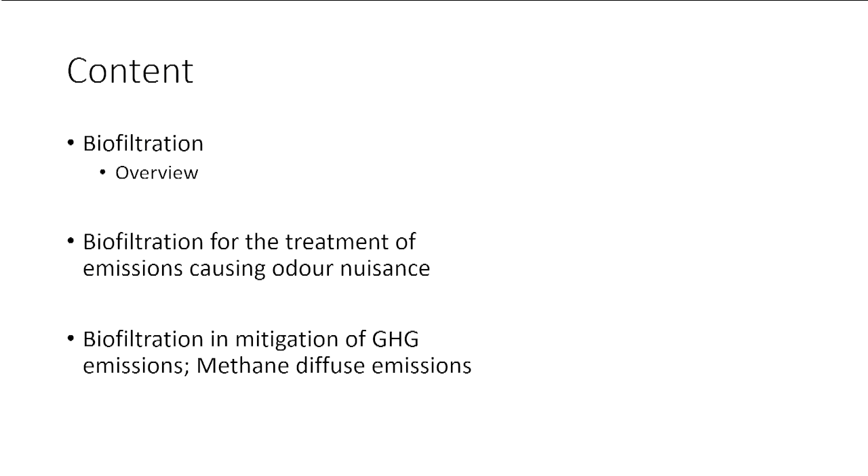In Chile, for example, we have different sectors that have been regulated in terms of the impact of odor. Also, because of the problem of global warming, I think it's very important to look at biofiltration as a tool to decrease emissions, mainly those generated in landfills or wastewater treatment plants, and in different agropecuarian activities that generate methane, but in very low concentration, not valuable enough to get energy from them.

So let's see what a biofilter is. A biofilter is a very simple technology, a very simple equipment in which you pass contaminated air through a filter normally composed of an organic material or a mixture of organic materials, in which microbial communities are established to degrade all the compounds that go into the contaminated air.

Normally, those communities are present in the organic material used for the biofilters, or can be inoculated using aerobic sludge from a wastewater treatment plant, or we can inoculate with pure cultures with specific abilities to degrade the contaminants present in the emission. That is the strategy we are using nowadays in the developments we have participated in at an industrial level.

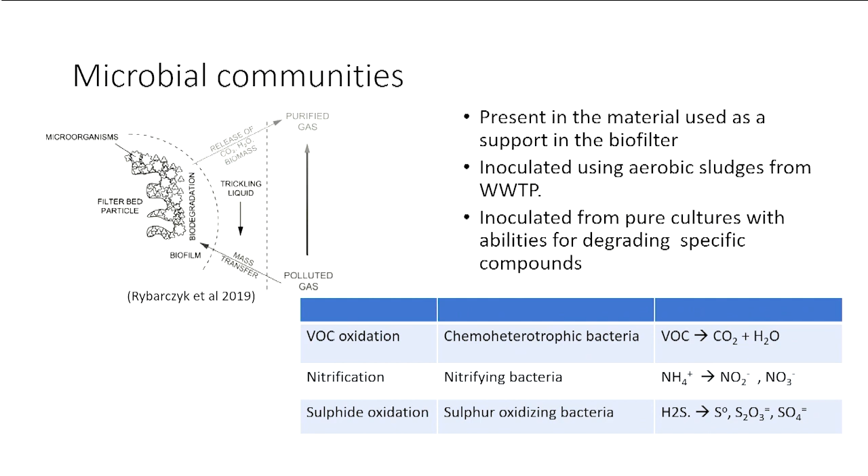These microorganisms form a biofilm over the support, over the substrate that is used as a filter.

I hope it works. Thank you very much. I hope it works here on the red one. Okay, okay.

For this bed, we can use several organic materials: peat, compost, bagasse, wood chips, forest residues, pine bark, soil. It's also possible to use different inorganic materials that give different properties to the support. For example, zeolite, vermiculite, or perlite increase the water retention of the material, so the microbial activity can be maintained. Also, shells are used in order to keep the pH of the system stable.

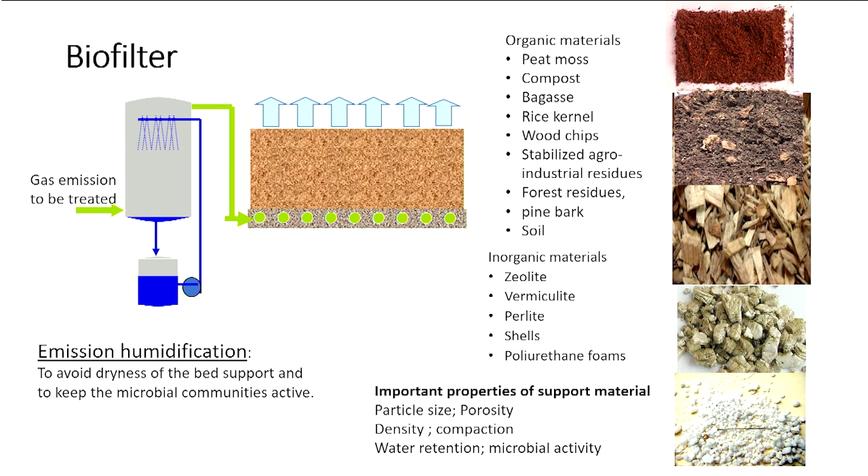This is how a biofilter looks, an open bed, and this is a closed bed. As you can see, this is also affected by atmospheric conditions; in winter or summer there are different conditions in the operation of this equipment. A closed bed avoids those different atmospheric conditions, and in this case, you can have the emission going downwards through the bed.

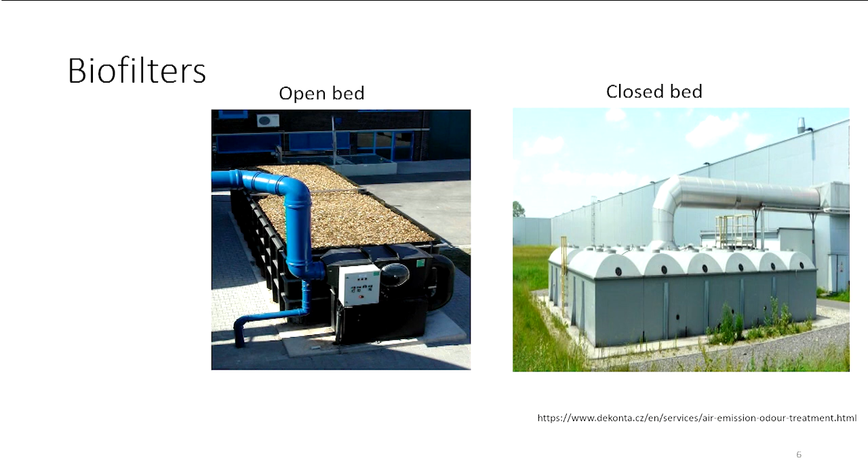The other biofilter is the biotrickling filter. That is a kind of scrubber in which the biofilm is on a support material that is an inorganic material. In this case, there are some solutions circulated through the column to keep the pH and to provide nutrients to the biofilm, keeping it alive and active. This is a more controlled reactor. You can control the pH and the temperature, and it looks like this. These are the different supports that you can use. Usually the same supports used in a chemical scrubber are used in this equipment.

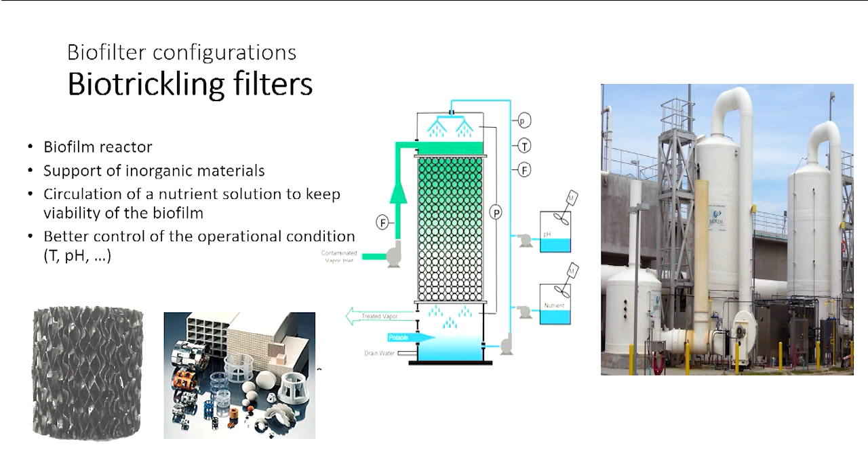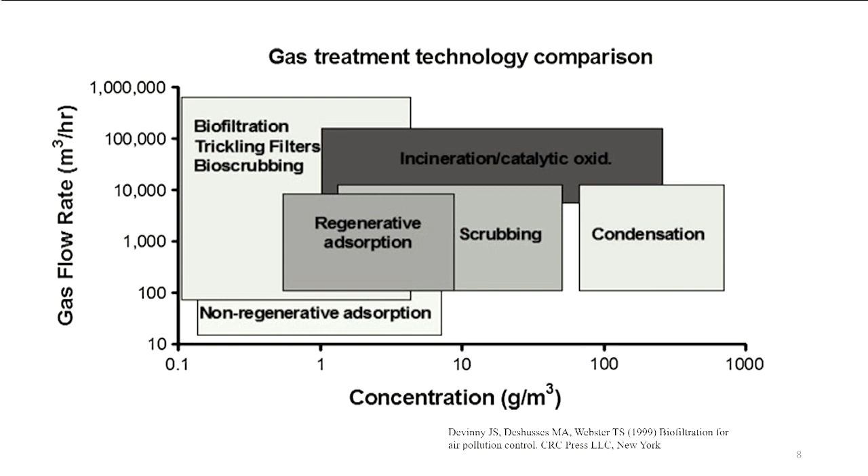This is a figure showing the applications of different gas treatment technologies: condensation, incineration, scrubbing, regenerative adsorption, non-regenerative adsorption. Here we have biofiltration, trickling filters, and bioscrubbing, which are cost effective when we have very low concentration of contaminant and very high gas flow to be treated. This is also where we find problems associated with odors, for example.

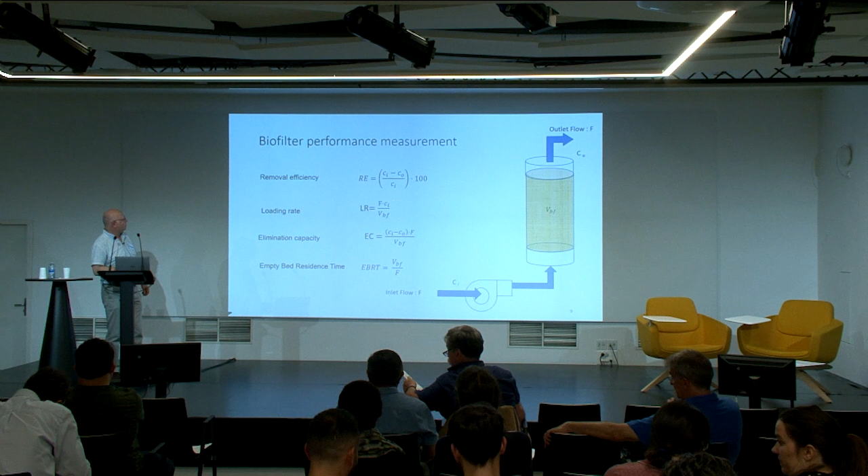In terms of measuring the performance of the equipment, it's possible to calculate the removal efficiency, just the difference between the inlet and the outlet; the loading rate, calculated as the concentration of the contaminant at the inlet multiplied by the flow divided by the volume of the biofilter; the elimination capacity, the difference between the inlet and the outlet multiplied by the flow divided by the volume of the biofilter; and the empty bed residence time, the volume of the bed of the biofilter divided by the flow. These are the main variables we use to know how the equipment is operating.

There are many phenomena that occur inside the biofilter. We have a biofilm, a liquid that usually trickles through the system, the support, and the contaminated air circulating over the system.

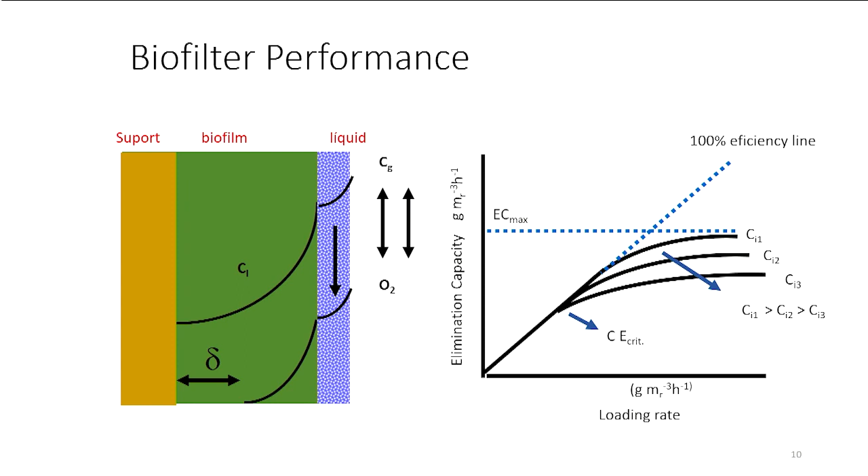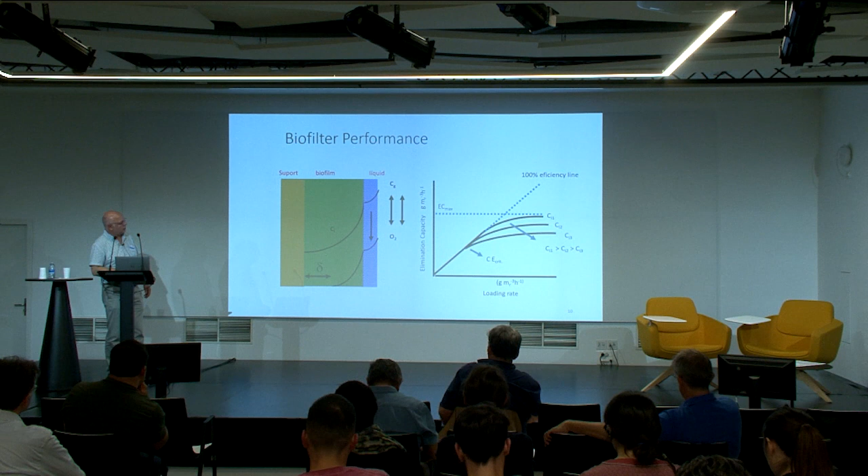This is the typical graph showing loading rate versus elimination capacity. This line corresponds to 100% efficiency. For example, if the loading rate is 1, the elimination capacity is also 1, giving 100% efficiency. But if we increase the loading rate, the curve moves away from the 100% efficiency line, depending on the concentration of the pollutant and also the empty bed residence time used in the reactor.

For example, here we have a biofilter with a biofilm of Thiobacillus thioparus for eliminating hydrogen sulfide, using peat as support. You have the sulfur loading rate and the elimination capacity. Here is the 100% efficiency line, around 30 and 30. With 25 it works better. Here we have 100%, and then the other part of the curve, meaning the system is controlled by the activity of the biofilm, while here we have a problem with mass transfer.

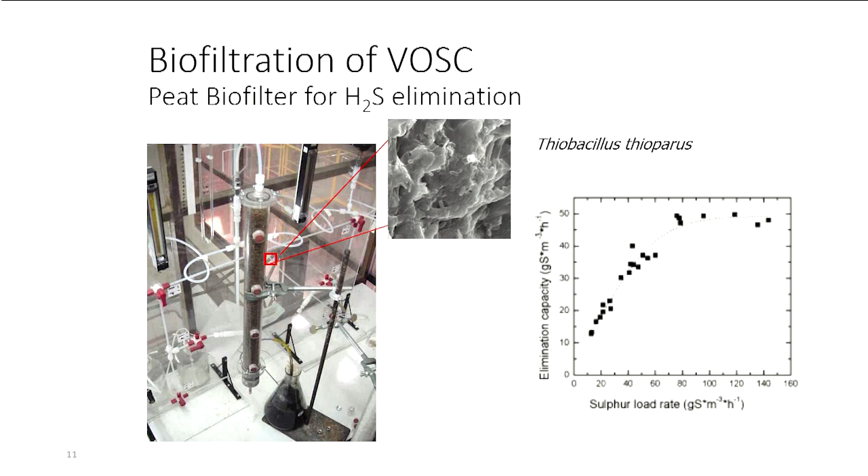This can be seen in these two figures, where by modeling and determining some parameters, we can see that in this part of the graph we have a limitation by diffusion, and here we have a limitation by kinetics.

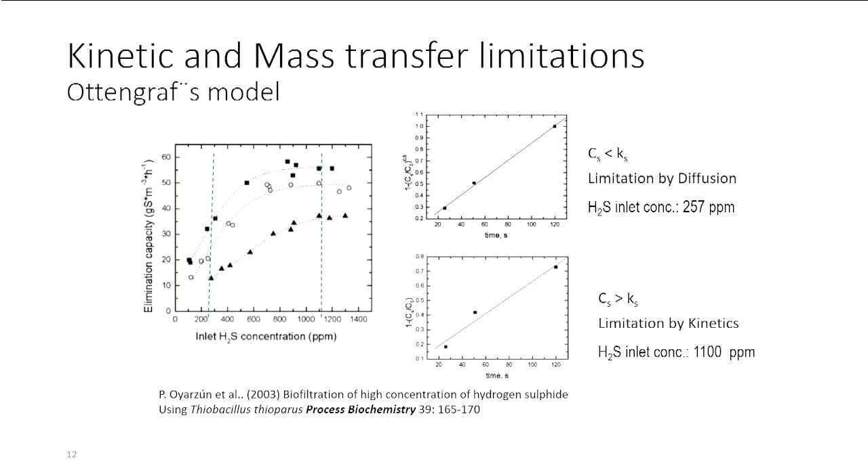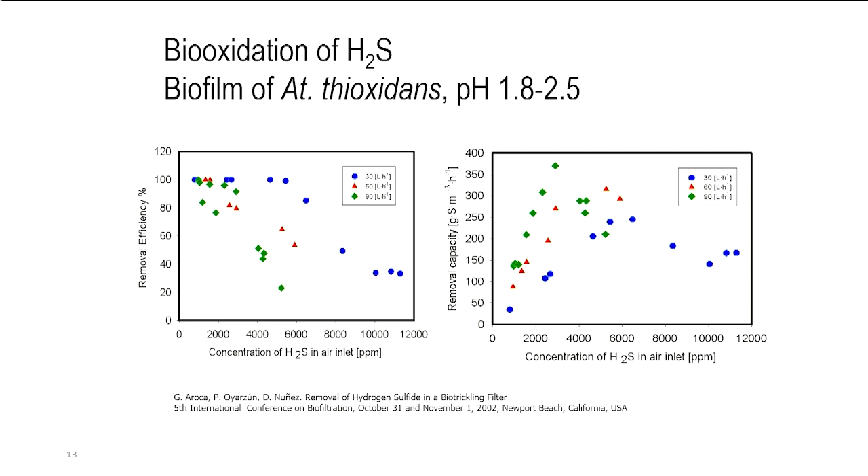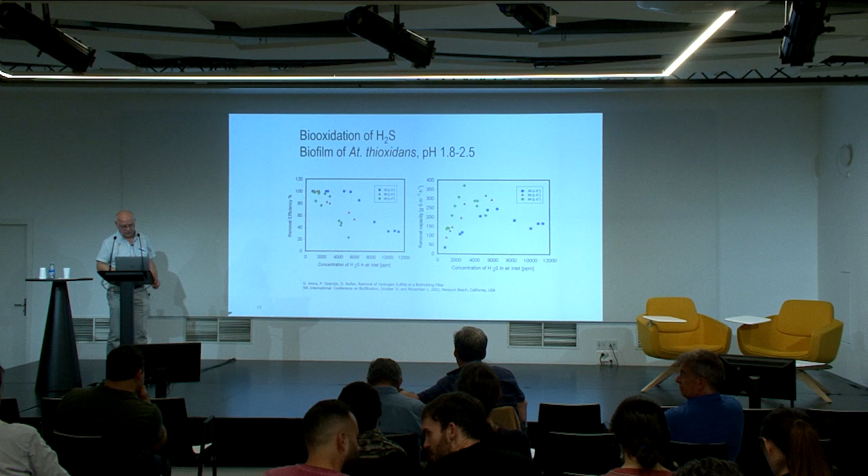In this graph we also see that Acidithiobacillus thioxidans, which has an optimal pH between 1.8 and 2.5, can grow and remove hydrogen sulfide at high concentration at the inlet of the reactor. It supports very high concentrations, here almost 6,000 ppm, which is a lot of hydrogen sulfide in the medium.

For that reason, it is possible, for example, to retrofit some chemical scrubbers to convert them into biotrickling filters. This is a work by David Gabriel and Marc Deshusses in a wastewater treatment plant in California, where they converted a chemical scrubber into a biotrickling filter by inoculating this kind of bacteria.

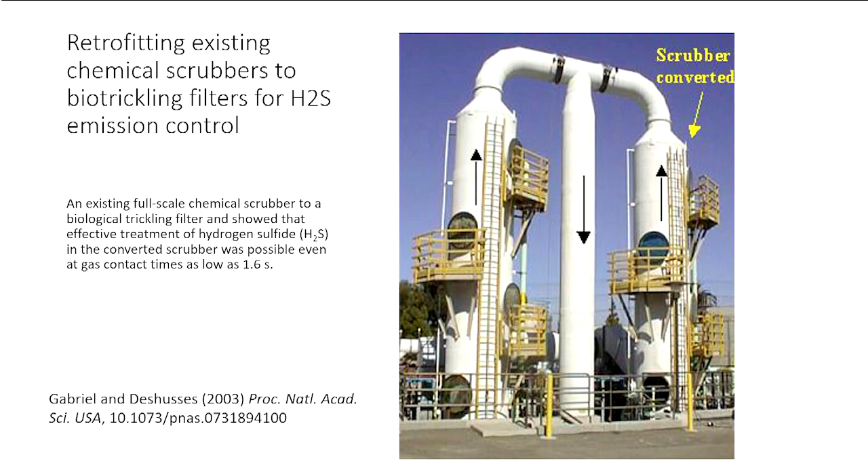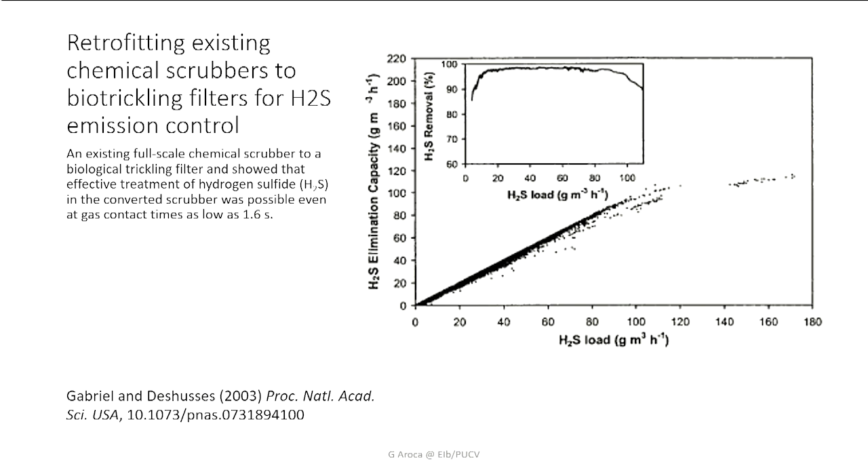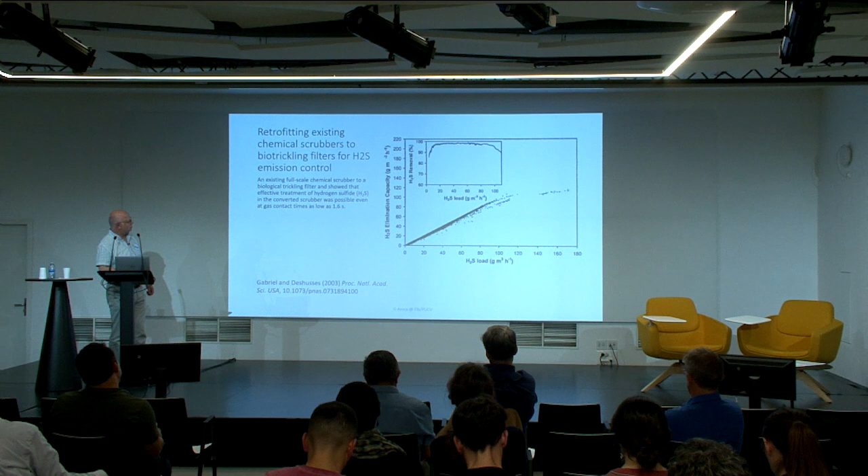And this is the result: this is the loading rate, and this is the elimination capacity. You can see that the 100% line holds up to 100 grams per cubic meter per hour. This is the efficiency here, and you can see the efficiency stays near 100% up until this value. So this equipment can be used very efficiently to remove this contaminant in wastewater treatment.

Also for ammonia, it's possible to find references of a very efficient system for removing ammonia.

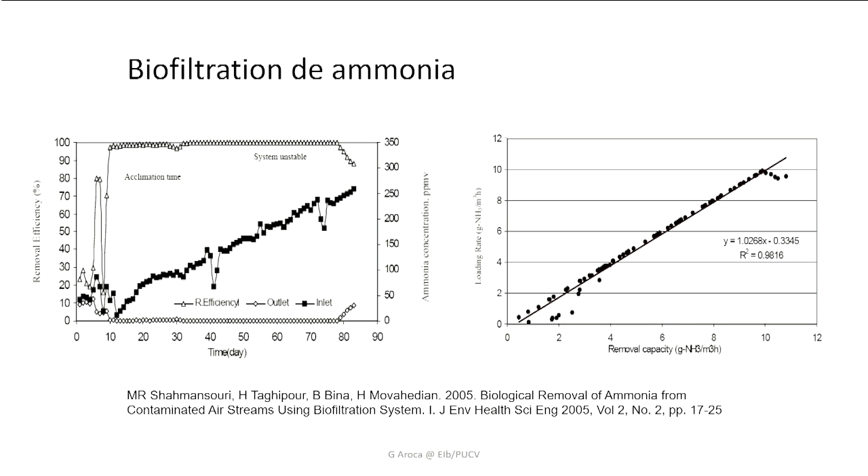So we can see that biofiltration is a robust technology when the emission contains one or a few compounds. Usually, it's used for treating odorous compounds like total reduced sulfur, hydrogen sulfide, dimethyl sulfide, and dimethyl disulfide. Also ammonia and trimethylamine, some VOCs.

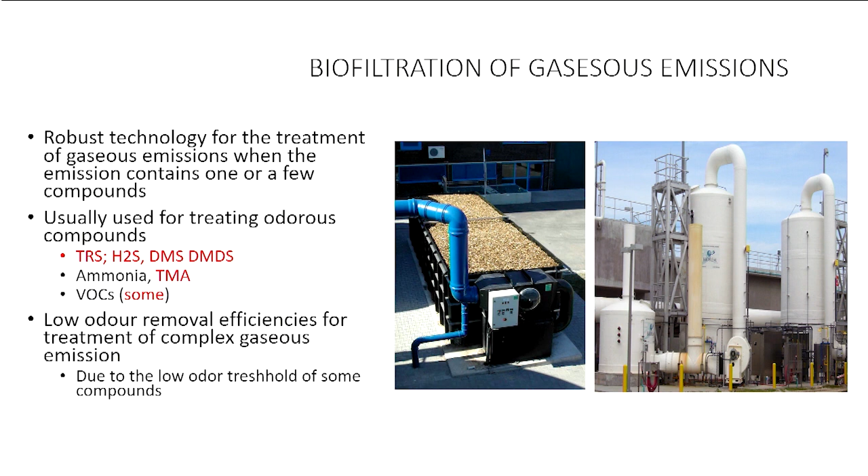But when we have more complex emissions causing odors, usually the efficiency is not enough to avoid the impact of odor nuisance of the installation, due to the low odor threshold of some of the compounds present in these emissions. For example, here we have this biofilter located in the very south of Chile, in Pargua, in la región de Llanquihue,

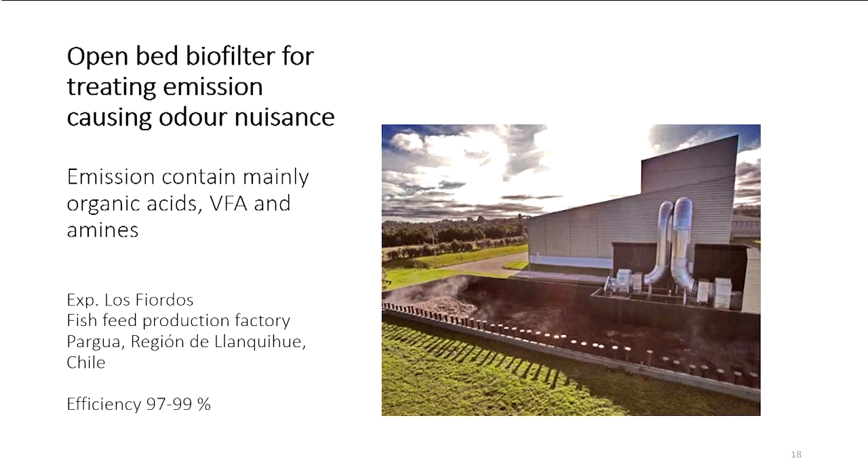that processes the emissions from a fish feed production factory that belongs to a company that exports salmon. The emission contains mainly organic acid, volatile fatty acid, and amines. The efficiency in removal of odor is from 97 to 99%, but depending on the meteorological condition, some days that's not enough to avoid the problem of odors outside the installation.

And in Chile, you may know that Chile is a very long country, almost 4,000 kilometers long. The government have located different activities causing odor nuisance, more than 2,000 sites in 2013. Most of them located in the middle of the country where the population lives. Almost 50% of the population lives in this area, in the region of Valparaíso and the Metropolitana.

And the main activities are related with animal, fish, and pet food factories, kraft pulp mills, pig farming, poultry and turkey farming, rendering plants, municipal wastewater treatment plants, and landfills.

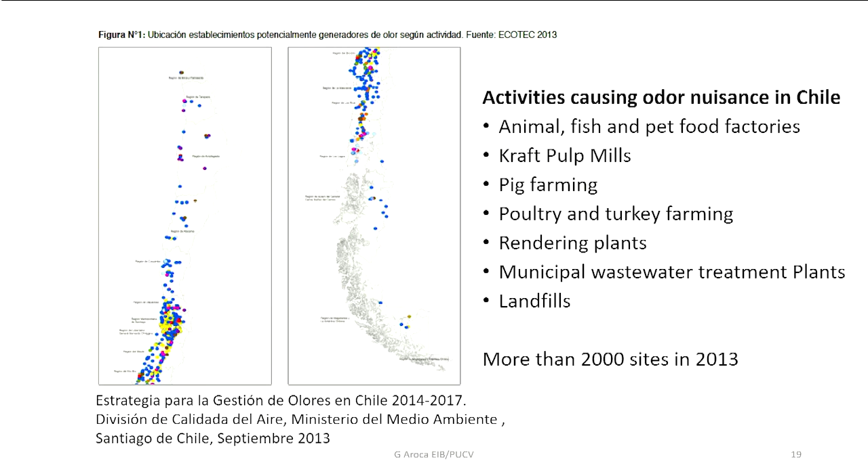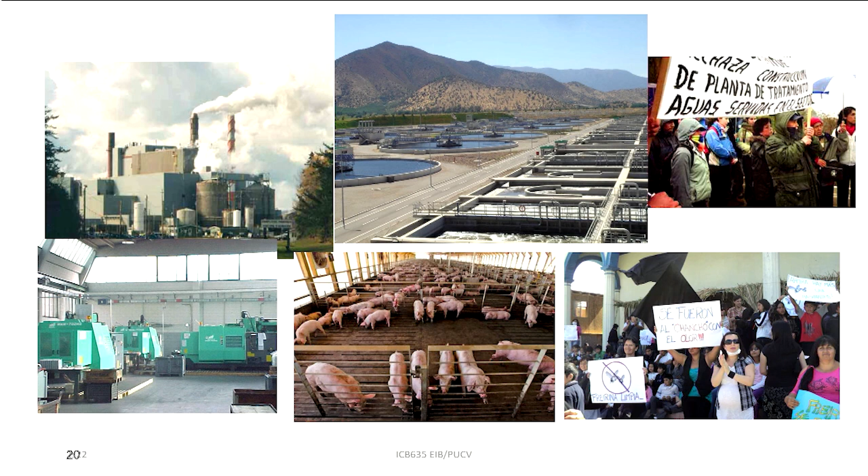This has generated a lot of problems with the authorities that promotes the creation of normative and regulations. And unfortunately, in Chile, we don't have regulation on land use in some areas.

So it happens that this is a plant of an animal feed factory near Valparaíso. You see this is the situation in 2006, and this is the situation in 2017. You see that there is new development here just beside the plant, so these people are impacted by the odors of the plant.

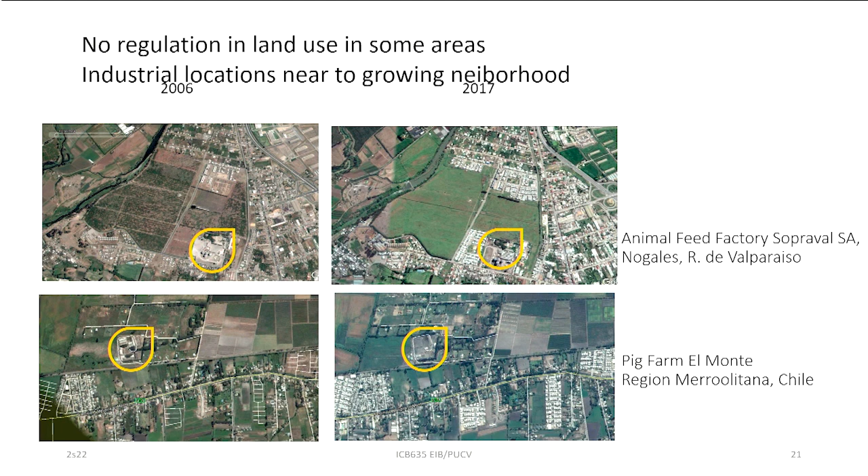This is also a pig farm in 2006, and now this pig farm is very near to new population. The same happens with the wastewater treatment plant and many other industrial activities.

But what about the odors? We can classify the odors as simple and complex. When we have a simple odor, we have just one compound, for example hydrogen sulfide, that is easily recognizable, like the odor of a rotten egg.

And all the odor substances have an odor threshold that is very low. For example, for all the reduced sulfur compounds, we have odor thresholds in the order of parts per billion. For example, hydrogen sulfide has 7 ppb odor threshold. So our olfactory system is designed to have the possibility to smell hydrogen sulfide at that concentration.

And also, in all these TRS compounds, look at the t-butylthiol - it's almost 0.09 ppb. So these are very, very low concentrations. So when these compounds are in an emission, it is necessary to remove almost 100% of that compound. Otherwise, it goes out of the system and generates an odor problem.

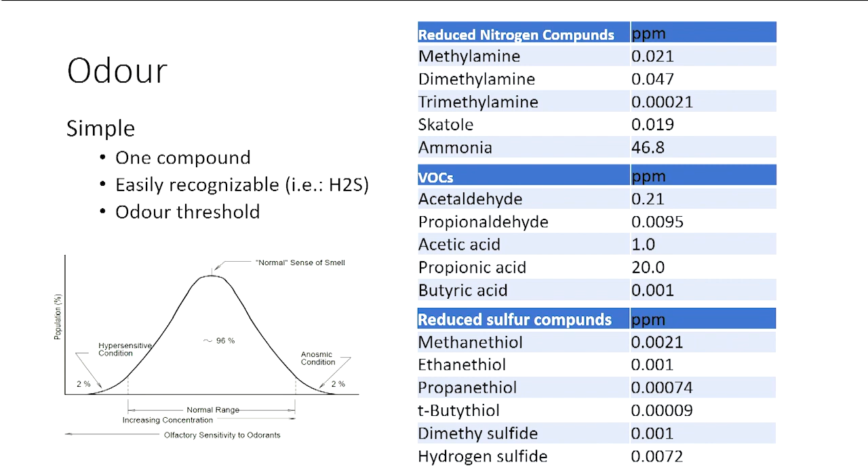So this is a problem then when we want to treat an emission containing odors. But the problem is more complex when we have many gaseous compounds in an emission. In this case, the only way to measure the concentration of the odor is by a method called dynamic olfactometry, that now is under a regulation, a standard, the EN 13725,

that is the standard for the determination of odor concentration by dynamic olfactometry in the EU. This standard was also adopted in Chile, and now we have a normative for measuring the concentration of odor by the same methodology. And the methodology allows us to measure the concentration in units of odor per cubic meter.

And it's done by a panel selected because they have an odor threshold similar, all of them related with a substance that is N-butanol. With this analysis, we can measure the concentration of odor in the emission, and by modeling, we can see how, depending on the meteorological condition, we have an impact in some areas, and how the impact will be in those areas.

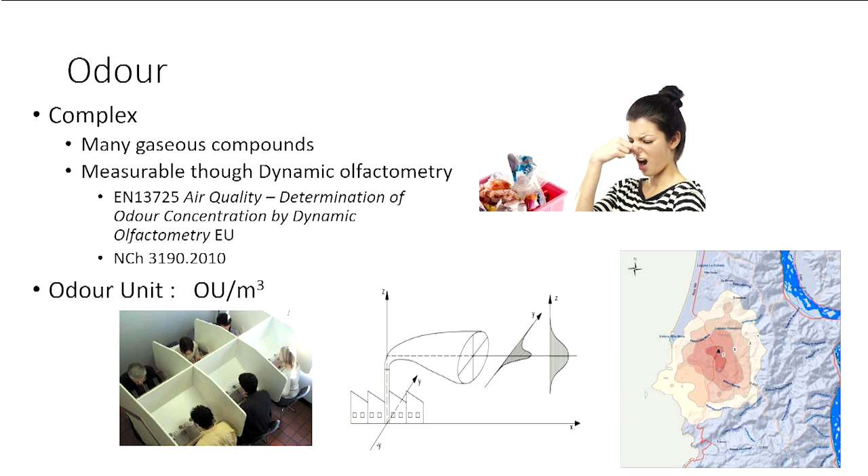So biofilters treating odor emission normally treat emissions that contain more than 100 compounds. Just some of them are odorous, and usually hydrogen sulfide and ammonia are present in high concentration, for example in the case of a rendering plant.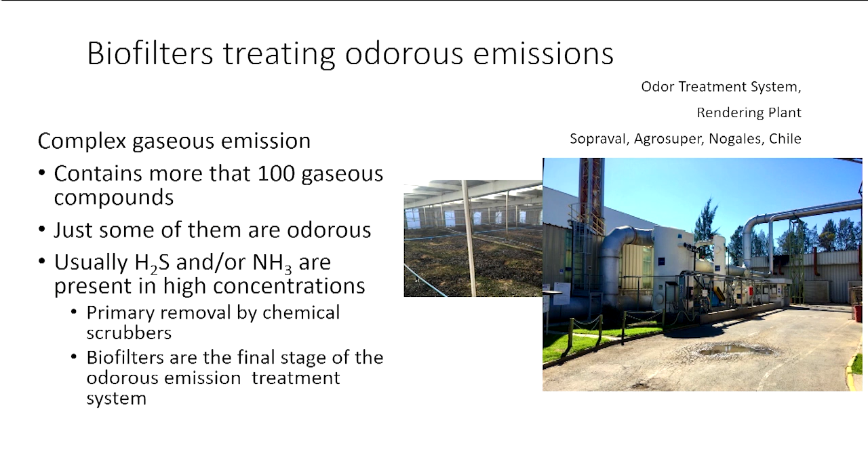In 2007, we were asked to find a solution for a rendering plant that was emitting a lot of odor and impacted an area of almost 20 kilometers around, almost a city completely impacted by the odors of the plant. This was the situation. The city is here in this part.

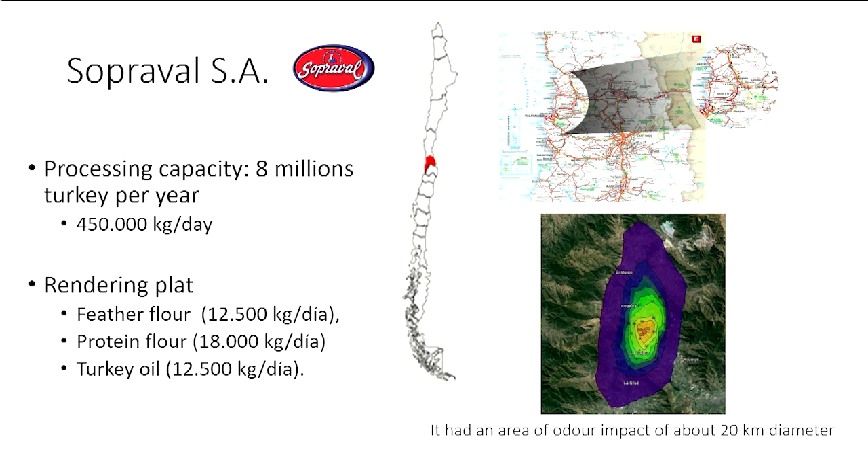This is a plant that produces turkey processing. They process 8 million turkeys per year, 450,000 kilograms per day. It's a huge plant. This is mostly for export, just 2 or 3% is in the Chilean market, and they have a rendering plant for producing feather flour, protein flour, and turkey oil, that's mainly used in pet food.

When we arrived, we made a diagnostic of the situation, and the situation inside was really bad. The operators always have the doors open because they cannot support the concentration of the contaminant inside the place. And we measured the mean concentration during the day, and we found that the H2S goes from 50 to 500 ppm.

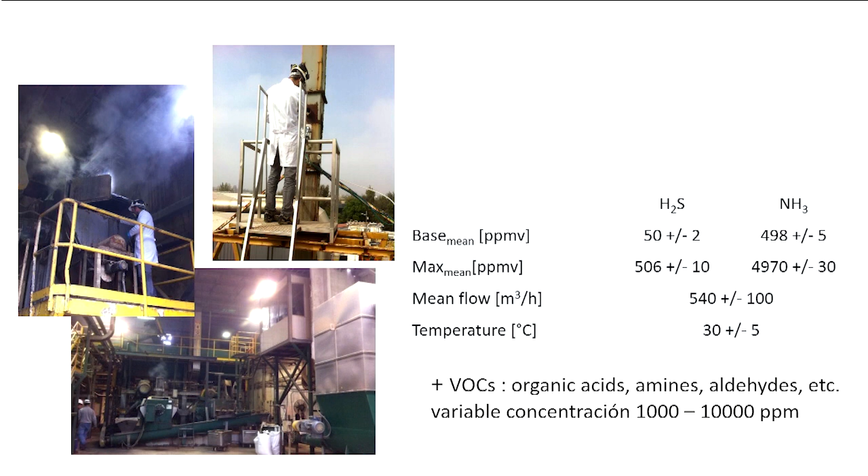In a day, ammonia goes from 500 to 5,000 ppm in a day, with a mean flow of 540 cubic meters per hour, and with a temperature of 30, more or less 5 degrees. And with a lot of organic acid that we couldn't recognize all of them, but with a variable concentration from 1,000 to 10,000 ppm.

And we designed a solution. Because of the concentration of sulfhydric acid and ammonia, the solution was to install 2 chemical scrubbers to decrease the concentration of the ammonia and sulfhydric acid, and then a biofilter.

We call this vahos críticos, that come directly from the equipment that produces the emission, the more concentrated emission. And the vahos fríos is the emission that we collect inside the building. We install a pneumatic system to extract all the emission inside the building to bring to the plant. And here we have the humidification.

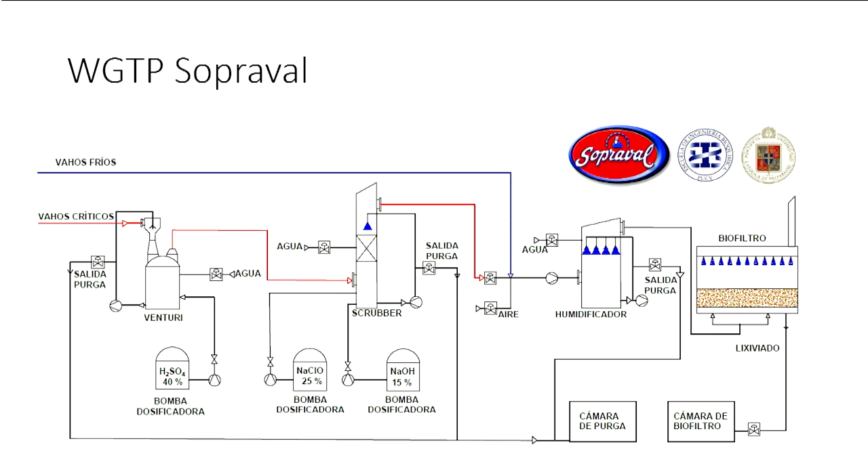This is the first scrubber that works with sulfuric acid to decrease the amount of ammonia. This is a scrubber for the sulfhydric acid that works with NaOH and sodium hypochlorite. And we have the humidification and the biofilter.

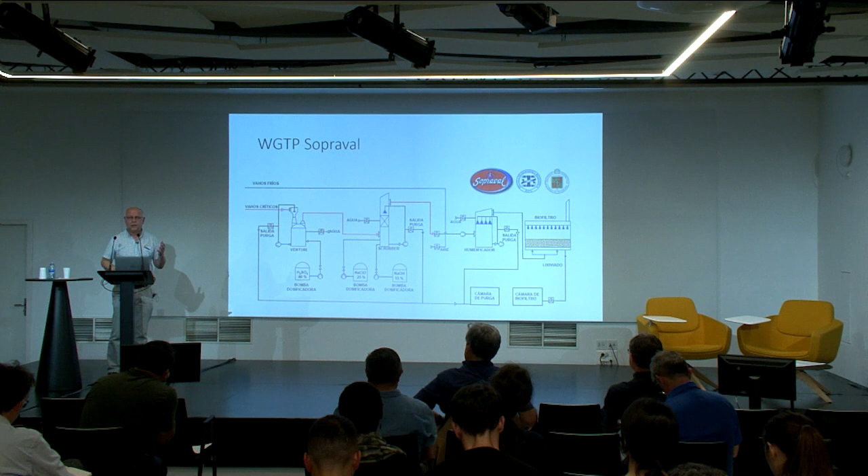Fortunately, the company accepted the solution -- I was very surprised, really surprised. And they hired an engineering company to make all the engineering details and the construction. And while I was here in France, in Alès, they were building the plant.

This is the plant. This is the first scrubber. This is the second scrubber. This is the line that comes from the building with the cold emissions. And this is the humidification system. Behind is the biofilter that has a chimney also, just in case we have some odors after the treatment, just to dilute the odors.

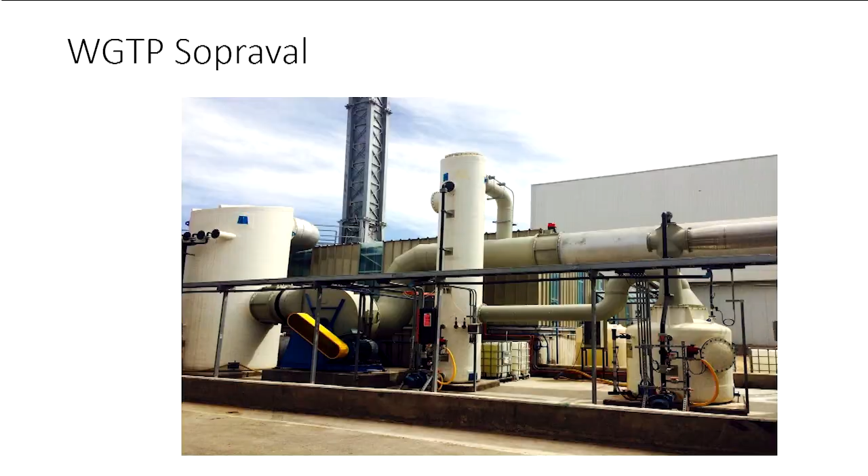They didn't have much confidence in the system at that time. And here you have the biofilter that has a roof, and this is the chimney. And here, I don't know if you can see, but this is the inlet to the biofilter.

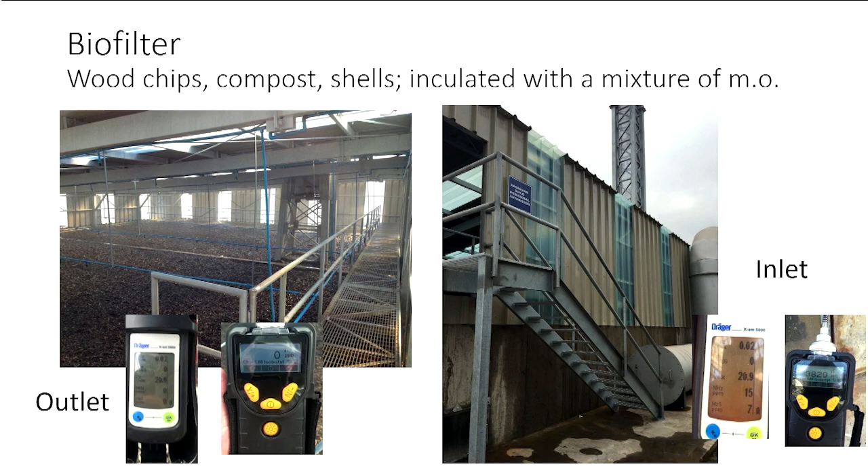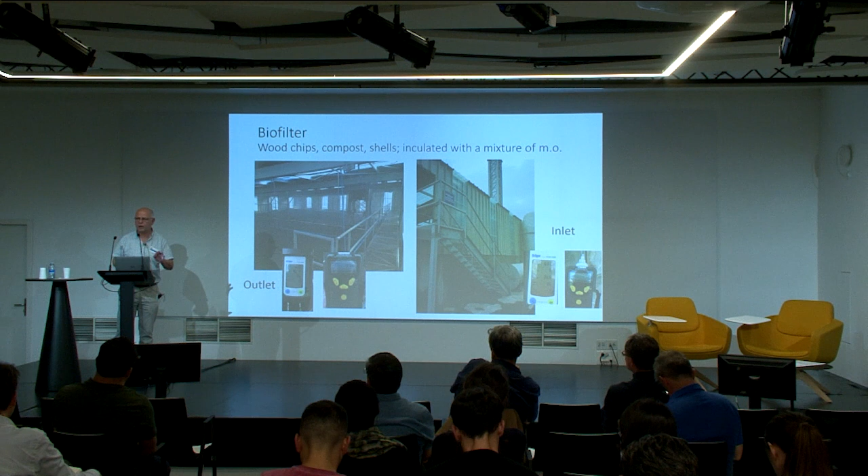The concentration of sulfhydric acid here is 7 ppm, ammonia is 15, and the VOC is about 3,300 units. And here you have the outlet over the surface of the biofilter, and you can see that it's 0 in VOCs and 0 in ammonia and sulfhydric acid. It goes very well. It has an efficiency of 100% most of the time.

So that allowed a solution in which the impact of the odor, that was almost 20 kilometers around, was reduced to just a few meters around the plant, with concentrations that are allowed by the regulators.

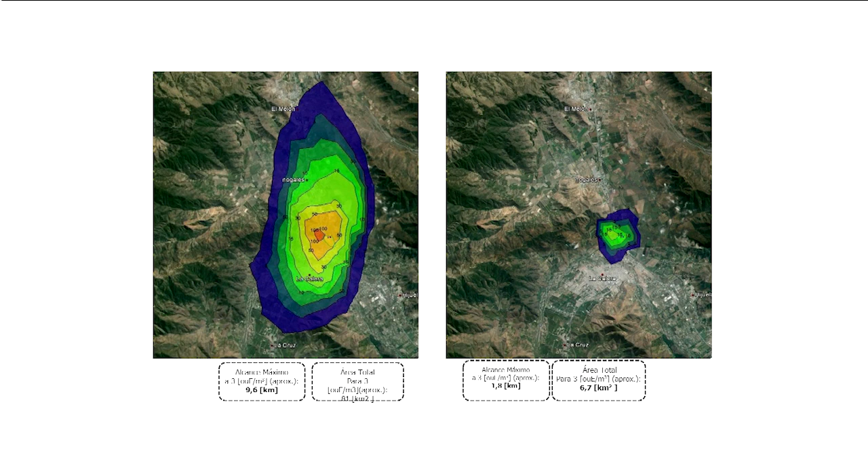But what happened in other industries? For example, in the pig industry, usually the odor removal is less than 70%. Usually, the biofilters there are reported with efficiency lower than 80%.

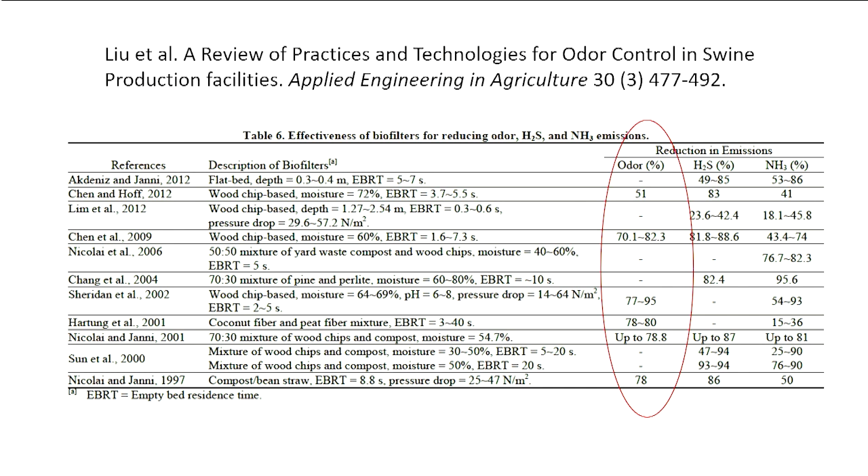And which is the reason for that? The reason is because when we have an emission with 100 compounds, the characteristics of these compounds are very different. And what's important here is this characteristic, these values, the Henry constant, the solubility, but most important is the log-K parameter that shows the ability of the chemical compound to form H-bond with water.

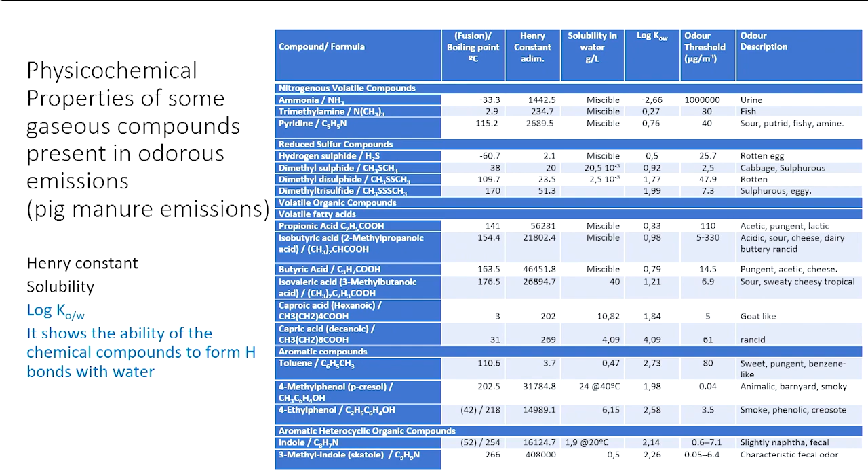That means that the compound is more or less hydrophobic and can be bioavailable for the microorganism to be degraded.

In a pig producing facility, swine producing facility, we have a lot of compounds coming from the protein, the more nasty compounds in terms of odors, aromatic compounds like indole and paracresol, that have very high log-K value. That means that these compounds are very hydrophobic.

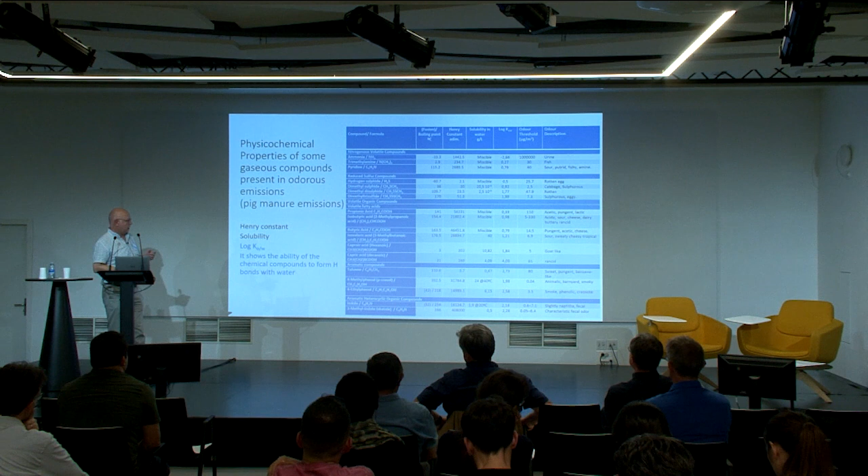So when we have a biofilter that works with humidity, where there is a lot of water, then these compounds pass through the system. So this is a very complicated problem, because depending on the empty bed residence time, the profiles of the concentration inside the biofilter are different.

So these profiles can lead to a stratification of the communities that we have inside the biofilter. For example, if we put an inoculum in the system, the community grows, we feed with the emission, and the emission generates some stratification that creates a profile of the different compounds along the biofilter.

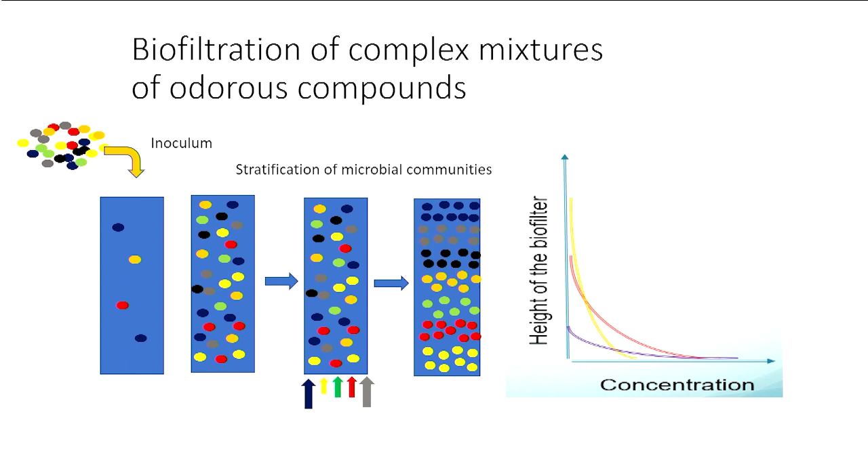And some of them can be completely degraded, and some of them are not going to be completely degraded and go out of the biofilter. And there are a lot of interactions in the microbial communities inside that make the problem a bit more complex.

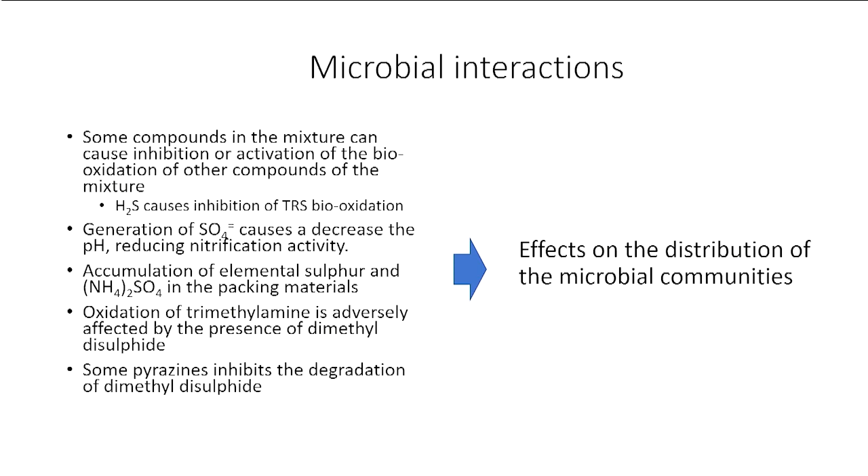Well, we set up an experimental system to see this, what happened in the biofilter. This is the column, this is a biotrickling filter with different systems to feed the different contaminants into the system.

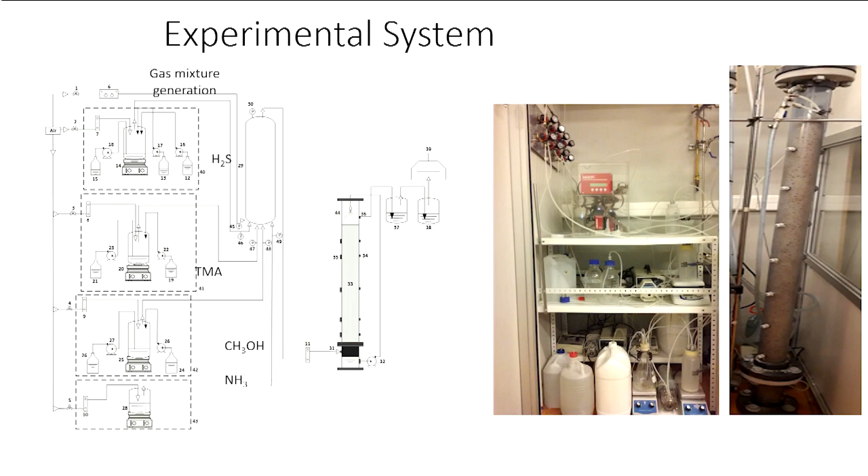And the mixture of gases was hydrogen sulfide, ammonia, methanol, dimethyl sulfur, 2,5-dimethylpyrazine, and we inoculated the biofilter with Thiobacillus thioparus, Aminobacter aminovorans, Methylobacterium organophilum, Nitrosomonas europaea, and Rhodococcus erythropolis. All these microorganisms have abilities to consume or degrade these compounds.

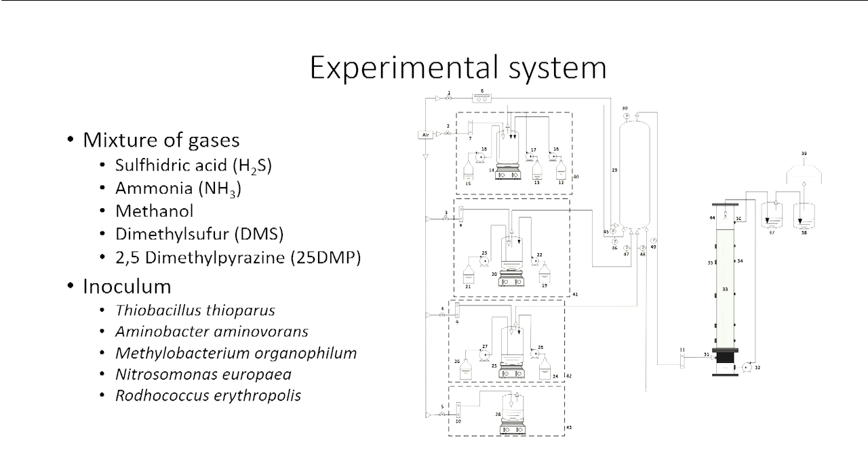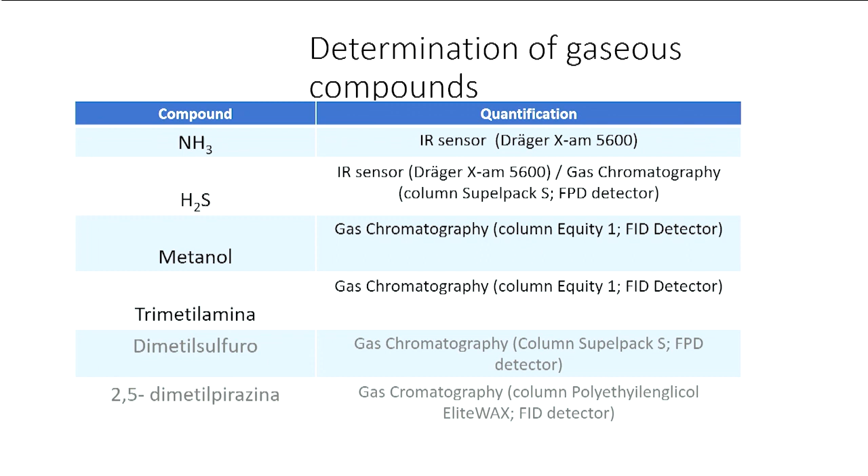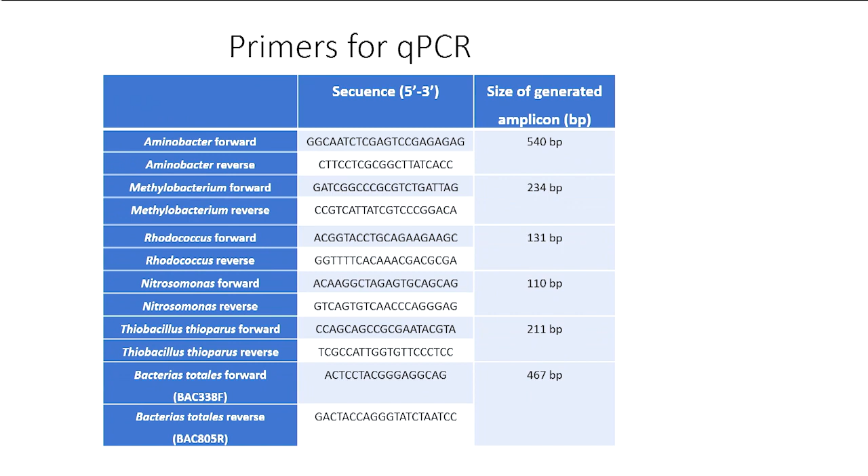Well, we measure all the system, all the compounds by different methodologies, by gas chromatography mainly. And we also set up all the methodologies for measuring the different genus present in the biofilter by qPCR.

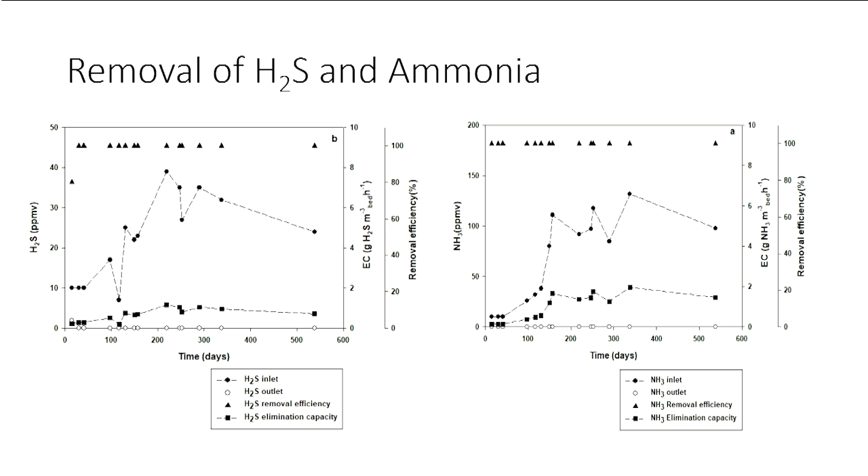We follow the biofilter for almost 2 years. This is the H2S concentration. As you can see, this is the efficiency, 100% always, 100% in the case of the ammonia. This is the removal efficiency. This is the inlet, and this is the outlet, always 0.

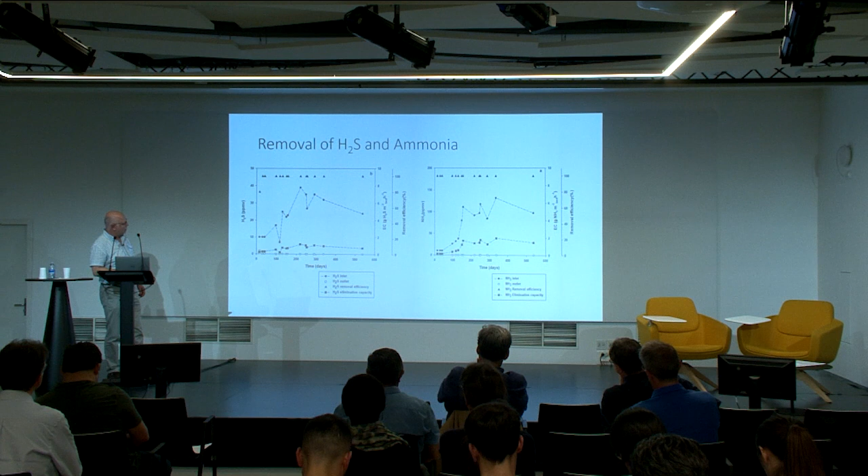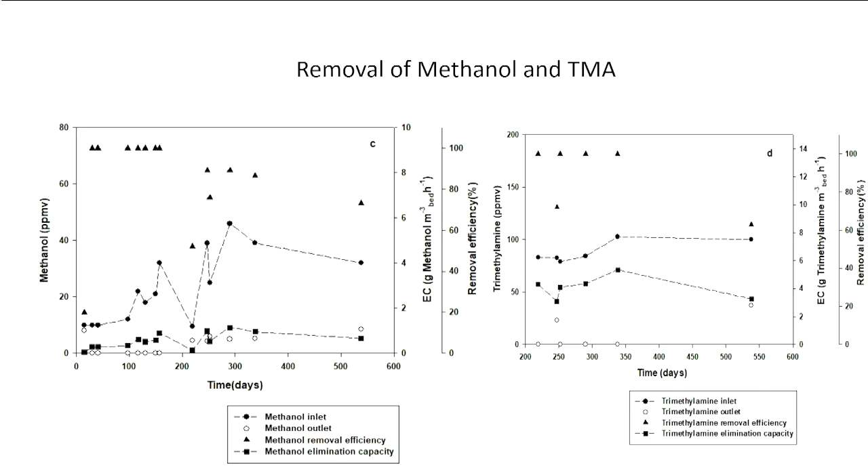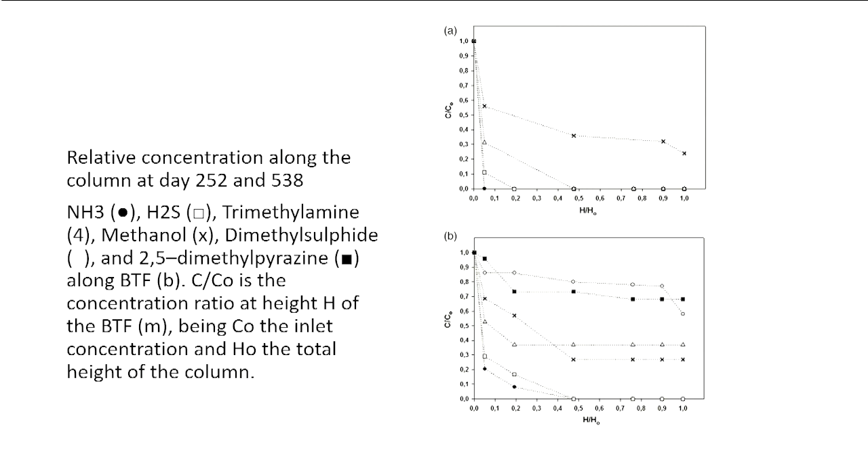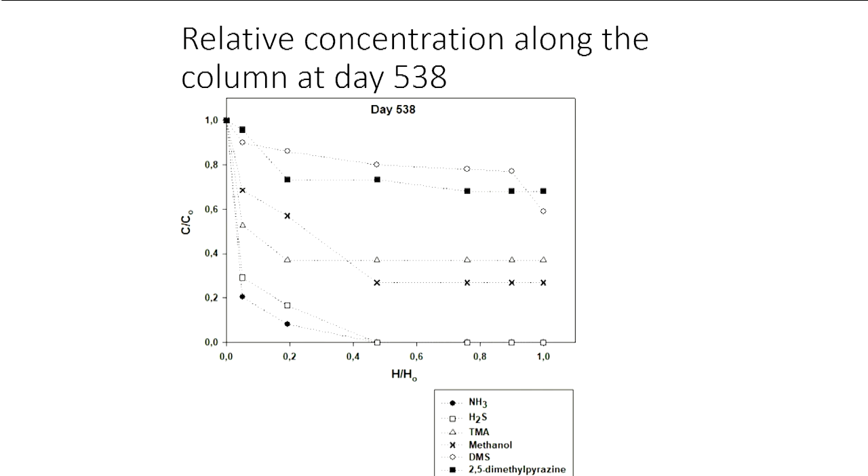In terms of the profiles, this is the profiles of the compounds along the column. This is at day 250, and you can see that sulfhydric acid and ammonia are consumed in the very lower part of the biofilter, and the other compounds were removed in other parts. This is the situation at day 538. You can see that ammonia and sulfhydric acid are consumed in the lower part, and the others are consumed in the middle part, but after that they are not consumed and go out of the column.

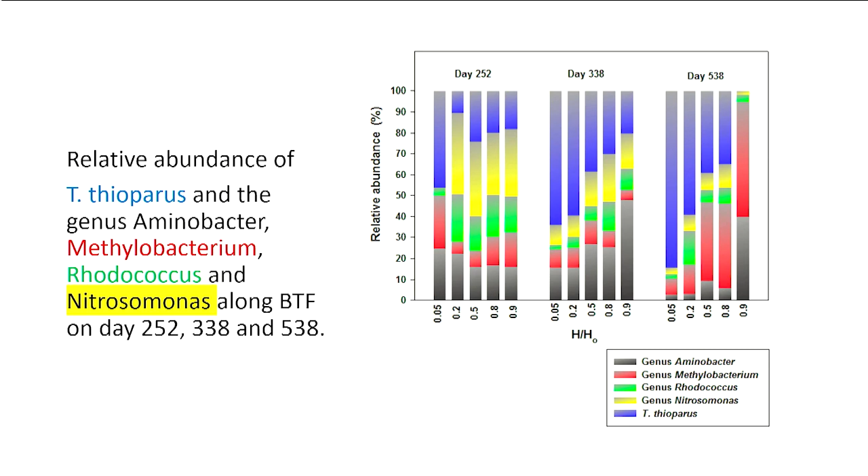So it's very difficult to predict what happens in the biofilter in terms of the different compounds that can be removed. That's a conclusion for that part, due to the different nature of the chemical compounds and the dynamics of the microbial communities inside the biofilter.

It's very difficult to predict the performance over time of a biofilter for treating emissions causing odor or other nuisance. This is very important for people that buy this equipment, because they want equipment that works 100% all the time. And it's very difficult to certify that situation.

I've had a lot of disagreement with people trying to sell these technologies, promising they would work well for a long time, but it was not possible to be sure. So more research has to be done considering odor concentration as an operating variable. It's also very difficult to find in the literature the performance of the biofilter in terms of odor units that are necessary in these cases.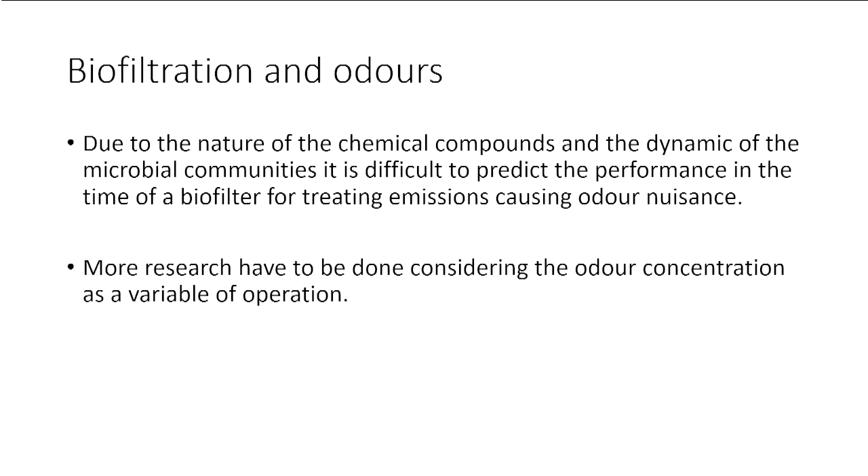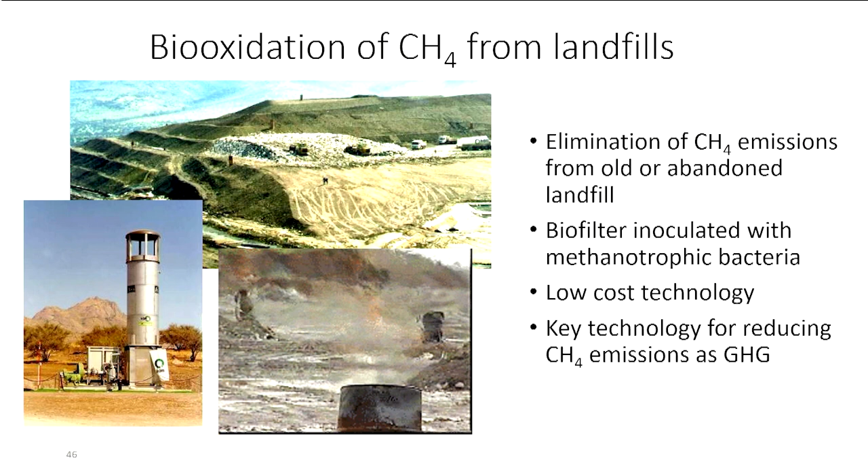The third part of this presentation is about bio-oxidation of methane from landfills, particularly the elimination of methane from old or abandoned landfills. Almost 50% of the methane produced in a landfill is liberated as a diffusive emission into the atmosphere.

Nowadays some people say we should worry more about methane than CO2, because we can get a better result in terms of decreasing the slope of the temperature increase that is generating these problems with climate change. It's a low-cost technology, just using biofilters inoculated with methanotrophic bacteria. Methanotrophic bacteria are ubiquitous, we can find them everywhere, and this can be a key technology for reducing methane emissions as a greenhouse gas.

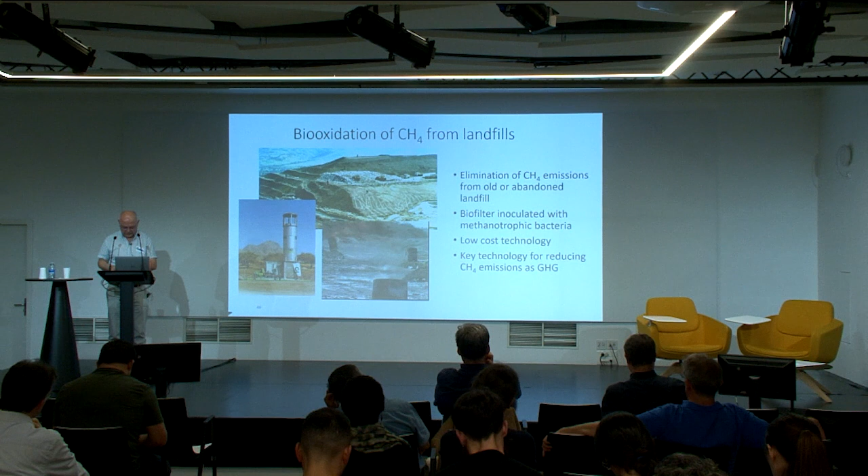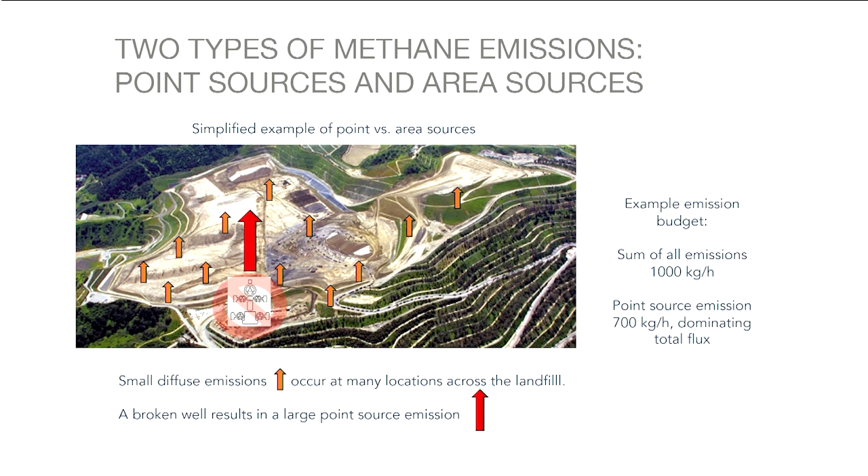In a landfill, there are different sectors in which this diffusive emission could occur. It's not easy to measure these emissions, but just a few months ago, a NASA plane with an instrument to measure emissions from the air took a picture of a landfill in Chile.

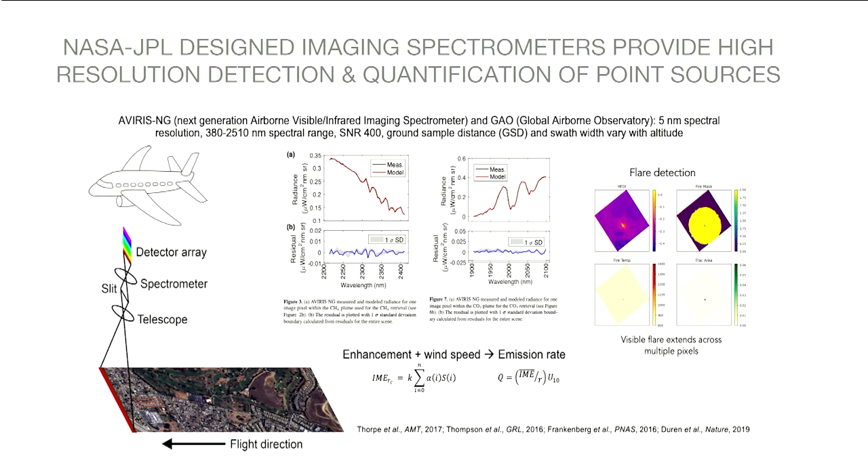It was in January, just in January. And you have some pictures. This is from the 11th of January 2023. This is the 13th, 14th, 31st - my birthday. And here you see the emissions of methane from the landfill.

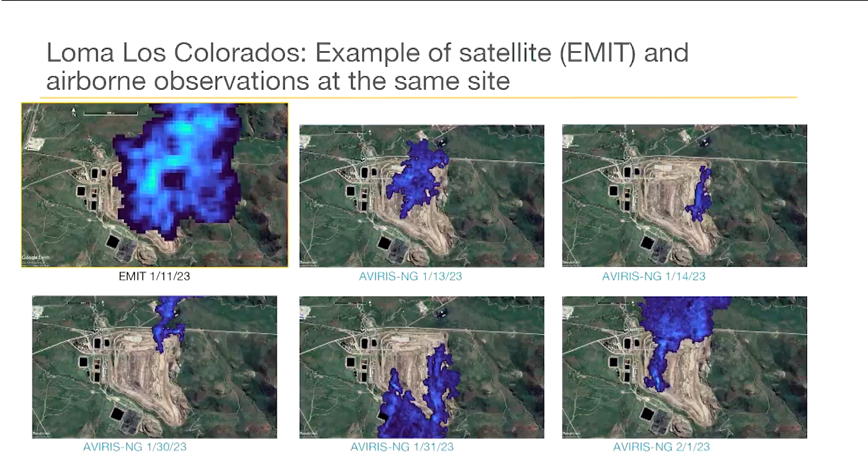They can estimate the emission. The emission in that landfill is about 673 kilograms per hour. In Chile there are more than 300 landfills, so we can multiply this amount by that number.

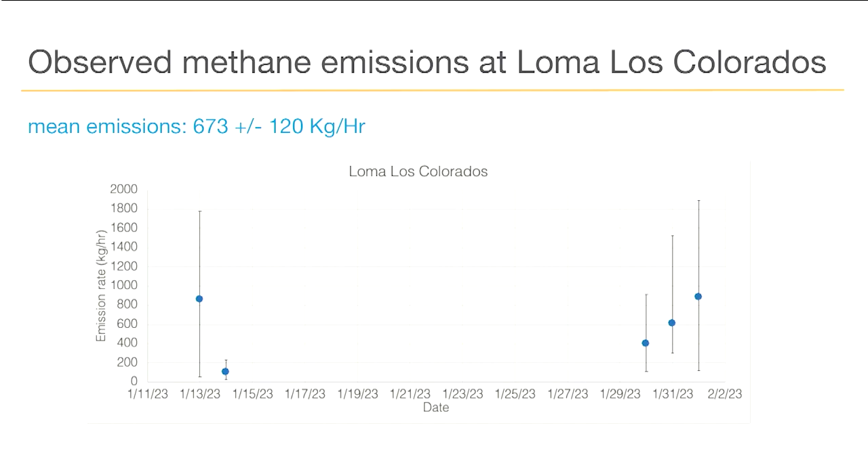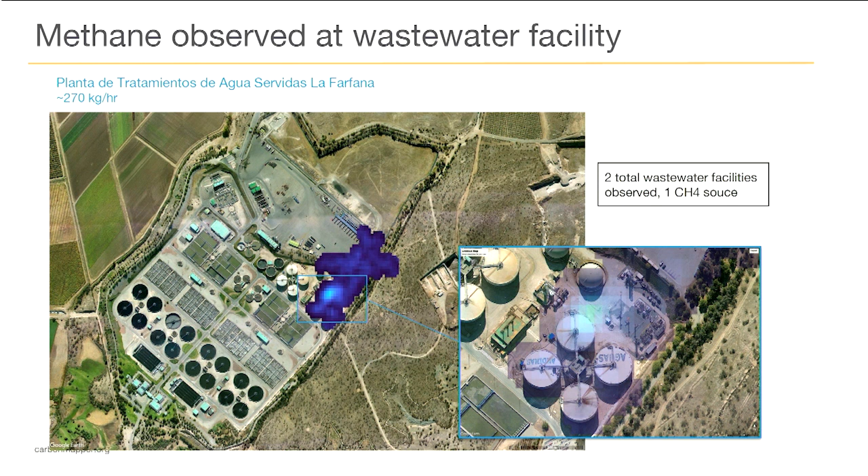They also took a picture of La Farfana, the biggest wastewater treatment plant in Santiago, and you can see that in the sector with anaerobic digestion there is a lot of methane. They estimate 270 kilograms per hour of methane emission from that system. So diffusive emissions are really a problem that has to be solved in all these operations.

There are some people working on this - two brilliant scientists who have been working on this for a long time. They propose bio-windows, bio-covers, and biofilters to solve this.

These bio-covers and biofilters just put material in place to guide the landfill gas through a system in which methanotrophic bacteria can oxidize the methane. The same with the biocover, which is just placed as a different cover on the landfill to protect the system. But the idea is to develop a biofilter that can do that.

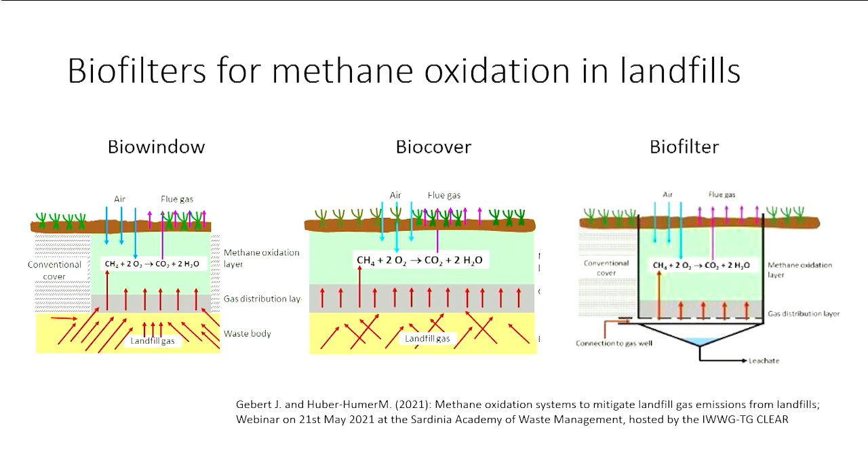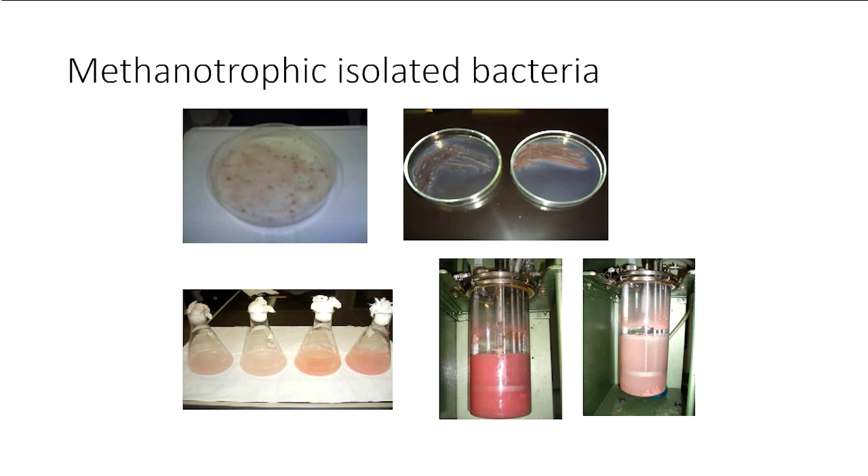We can have a biotreatment filter everywhere, ideally, to better control the conditions. So we did some isolation of methanotrophic bacteria from the landfill cover. These bacteria have a typical pink color, and we grew them in a reactor. We inoculated different biofilters and studied the effect of the inoculum on the bio-oxidation - that means we did bio-augmentation, and it worked very well.

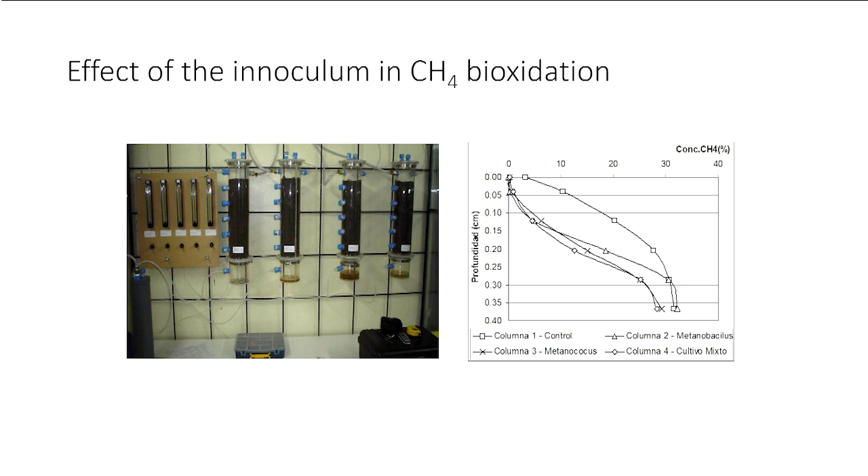But there is still plenty to do on this subject. For example, to improve the mass transfer of methane in biofilters due to its low solubility, to understand the behavior of methanotrophic communities in the dynamics of biofilters, and to study the effect of other gaseous compounds present in the diffuse emissions, because when you have a landfill you don't have only methane - you also have hydrogen sulfide and ammonia. We are working on that nowadays.

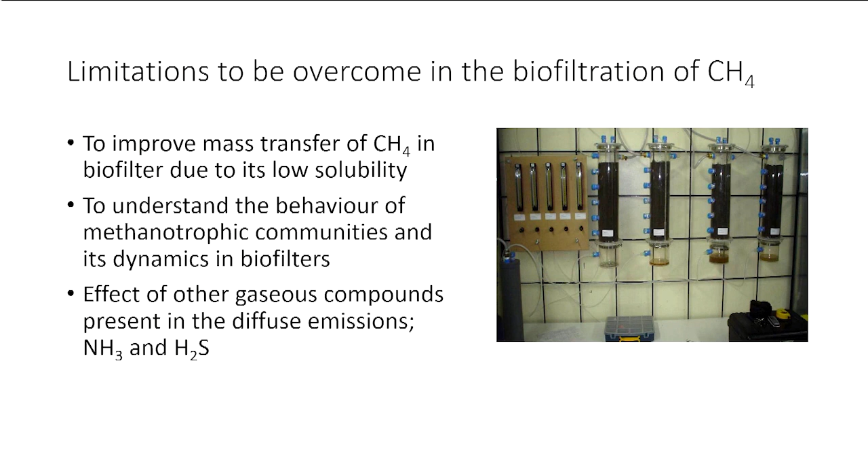So this is my presentation. Thank you very much for your attention, and I hope to have some questions.